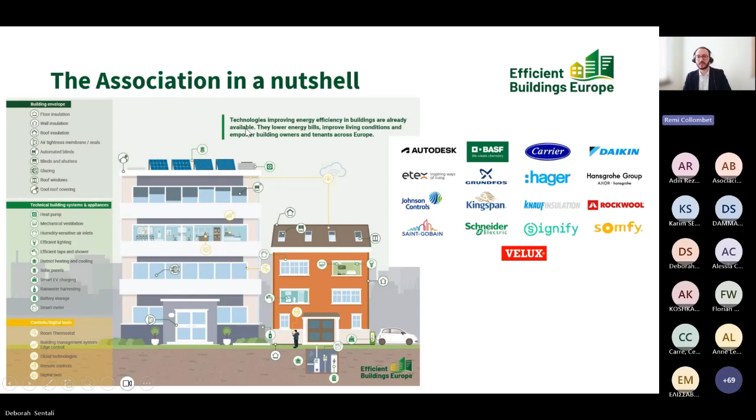We'll have 2 sessions. First one looking at the macro level, the policy level, and perspective from the insurers. People literally cannot afford not to look at the impact of climate change. Session 2 will be a more micro-focused session looking at how concretely on the ground cities are adapting and technology providers can push solutions to help us navigate and manage this adaptation question.

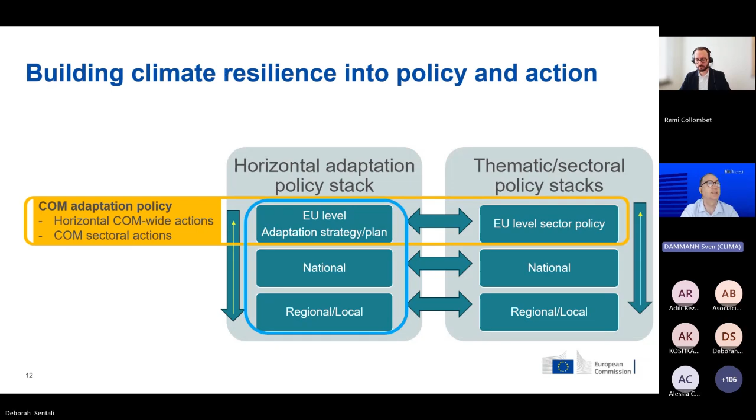So this all will be part of the policy package that we plan to deliver end of this year. There will be a communication explaining the entire context. There will be this legislative proposal that I've mentioned. And then also an impact assessment with summaries of the extensive stakeholder consultation that we have run preparing this proposal.

And this digital tool, a European climate viewer, helping the responsible authorities to look in granularity at what climate risks they are exposed to.

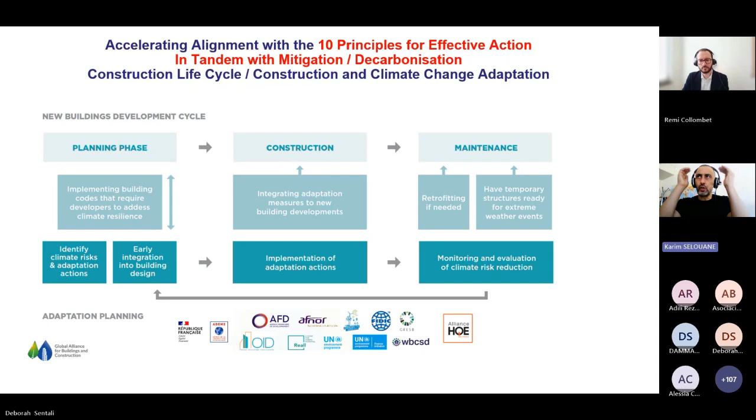All these documents could be downloaded from Global ABC if you want more information, but it's very important to know that the 10 principles are included inside the Déclaration de Chaillot, signed in March 2024 by more than 75 states.

Now, how does this international proposal, this international advocacy, find a very tangible alignment with a national strategy? This is the example of the French method of ABCD.

As mentioned by the previous speaker about the context of climate change in Europe, in France specifically we have some predictive models. We try to follow TRACC number 3, and we include the scenario of plus 4 degrees, looking at how we could prepare the building sector to be adapted in the context of plus 4 degrees.

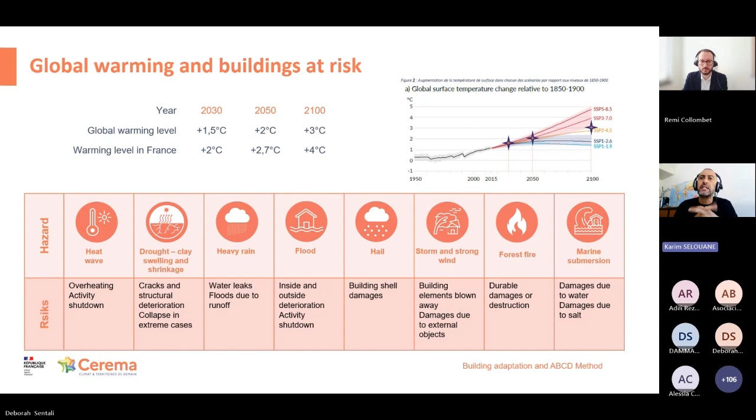We know that there are some hazards and specific risks related to the building sector. Each hazard has a specific impact on the building sector, as mentioned in this slide. For example, for flood you could have inside and outside deterioration of activity and shutdown. For storm and strong wind, you could have building elements blown away, damage due to external objects, etc.

The phases of the ABCD methodology, in French this is Adaptation des bâtiments au climat de demain. In English, Buildings Adaptation to Tomorrow's Climates.

Two points. First, this is real estate risk diagnosis. This is the baseline that we need to have: framing of diagnosis, exposure analysis, vulnerability analysis, crossing risk analysis, and prioritization.

The second pillar is adaptation strategy based on this first point: selection of action, adaptation logic - reactive, incremental, and transformative. It's very important to keep in mind that the adaptation action should be very agile, because you could have uncertainty in predictive models, and the question is how you could invest with good investments without wasting your money, with the good solution, without the solution you design today becoming obsolete for the next decade, for example. That is something very important with the incremental process. And the trajectory and action roadmap, notably aligned with your specific predictive climate scenarios.

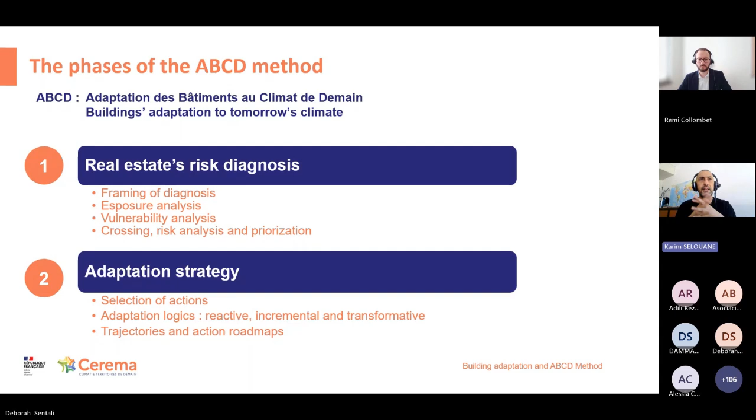Now we need to define the risk. We have two parts: external parameters and internal parameters. What we mean by external parameters is climate parameters with the TRACC level - this is the French reference that we use for TRACC number 3, for example, with specific national climate indicators validated by Météo France and the IPCC.

The second point is the territory's vulnerability. It's very important not only to have a building-scale vision, you need to have a much larger geographical area to have a clear vision about the externalities that could reinforce or mitigate your risk and the level of exposure.

For the internal parameters, this is the sensibility, the stakes, and the adaptive capacity. For example, concerning the stake, you don't have the same strategy if your building is a hospital, or if your building is a hotel, or a domestic house, because it depends on the uses of your building, and the uses have very specific stake consequences.

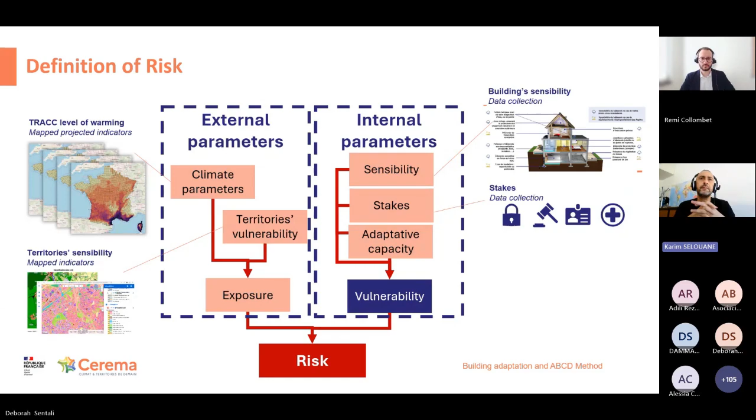Now this is the adaptation strategy. First of all, we have in France a national risk diagnosis, a map of the vulnerability. This is very important to have this first vision, because you could have some category of risk and prioritize your action depending on specific stakes, specific issues, and specific capacity to finance. It all depends on the balance between national policy strategy and local policy strategy.

The second point is a strategy that you want to propose based on this risk diagnosis, a strategy based on technical solutions, organizational solutions, notably concerning which governance you need to propose to be very adapted and to have a very proactive action to answer the risk, and nature-based solutions also for each national and local action for the building sectors.

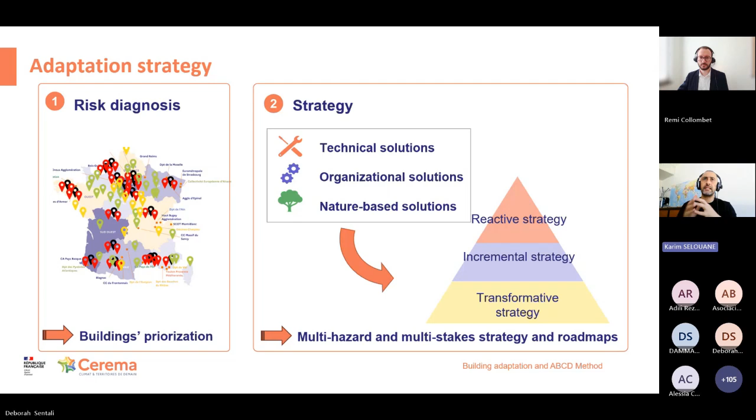Next slide. Suggested topics for the works. Data analysis at the beginning, for identification of available data.

Do you remember what I mentioned during my introduction for the 10 principles? This is the same, absolutely aligned. Actors managing this data, collecting this data, centralization and accessibility. It's very important to be sure that local stakeholders have access to this qualified data, with analysis for each climate hazard. And for technical solutions, what we mean is the identification sheet for each solution, data collection, monitoring, performance, collection of implementation cost, and cost versus performance analysis.

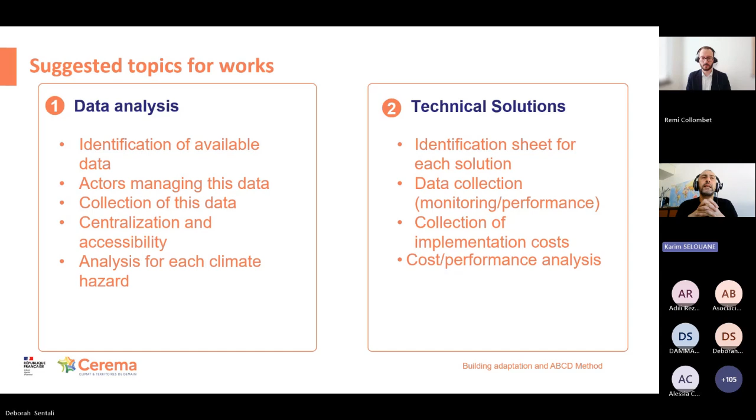Next slide, please. Thank you very much for your attention, and I am available to answer your questions at the end of this meeting. Thank you very much.

Very comprehensive presentation, really making the link between what's developed as a framework at the international level and how it's adapted in the national context.

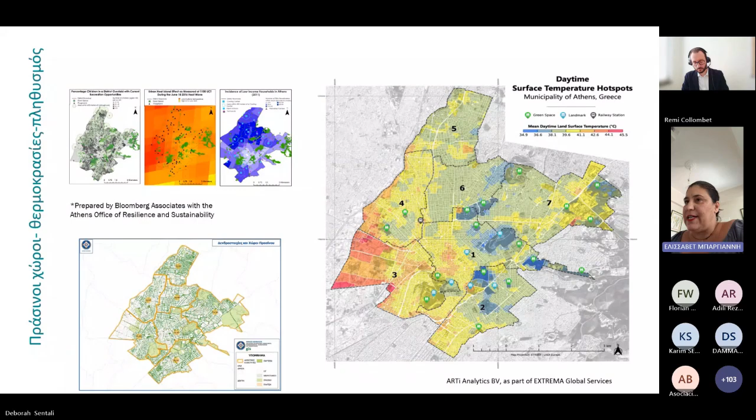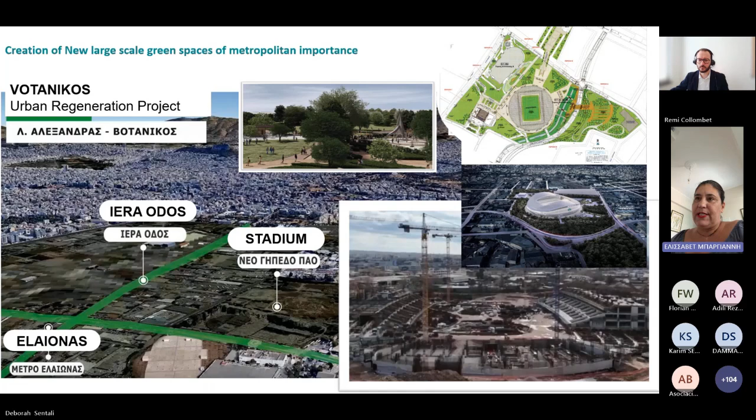So what do we do? In the west part of Athens, as you saw in the previous map, which is the most heat vulnerable area, we are creating now a 22 hectares size park in the ancient, it's a post-industrial site in the area of Elaionas, the ancient olive grove. It would be the biggest park in the city of Athens, trying to resolve issues with heat vulnerability and creating more green spaces in that part of the town and in the Western Attica area in general. Next slide, please.

We also set up a goal of planting 5,000 trees per year. That's a planting scheme that started in 2024, and we have created a registry and a monitoring platform that you can go and visit. So far, we've planted 13,000 trees. Next slide, please.

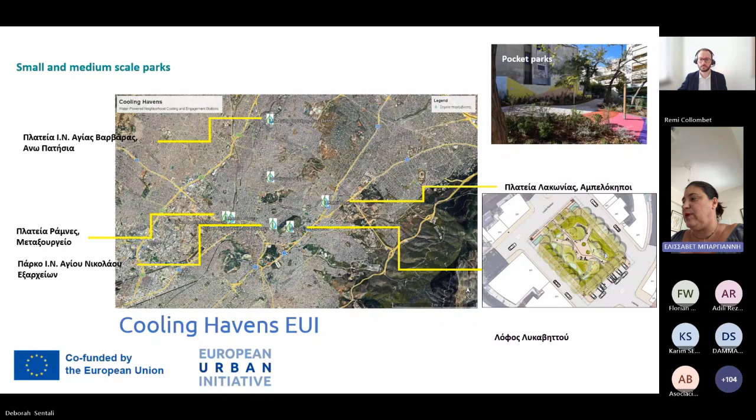But also we focus on creating more spaces where we have available spaces, such as pocket parks, and also a very interesting project that we do as an EUI project is the Cooling Havens project, where we try to create nature-based solutions and water features in 5 parts of the city of Athens, with stakeholder engagement and the participation of residents. This will be finalized in 2028. Next slide, please.

Recently, we've done the microforest, the first microforest in Greece, in one of the most densely populated neighborhoods in Europe.

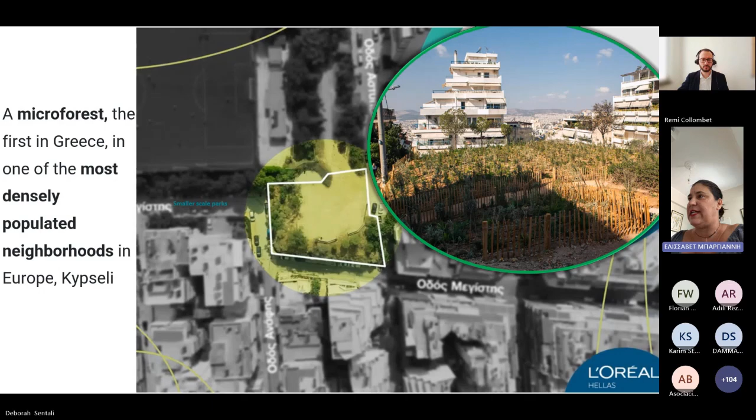We also focus on how to ventilate the city in a natural way by creating green corridors. In the city center, for example, we finalized the Athenian Great Walk and the Vassilissis Olgas Avenue, which has been recently finalized.

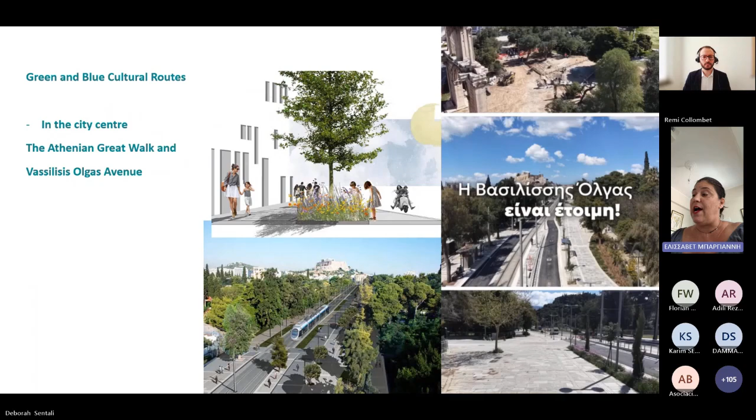On the local level, we have prepared tender documents for 3 neighborhood areas that connect other green spaces, creating using nature-based solutions, 3 avenues. What's important here is that because of the lack of space and the unavailability of space, it's very important for us to combine the mobility issues with green infrastructure issues. That's what we do, and that's where policies run down to.

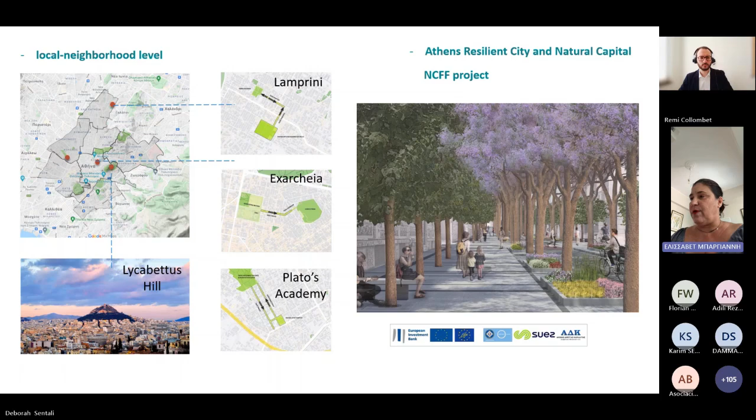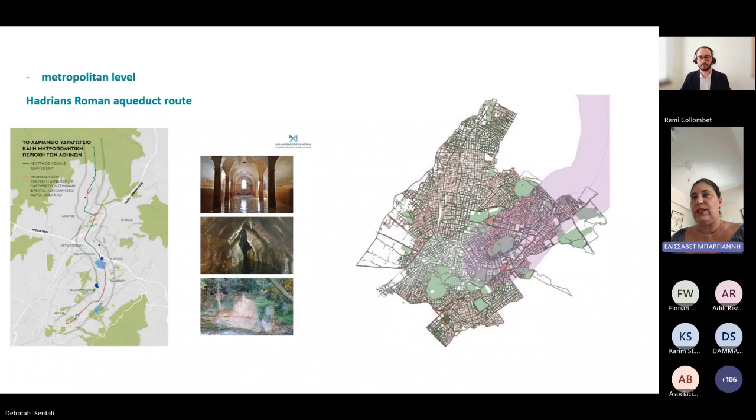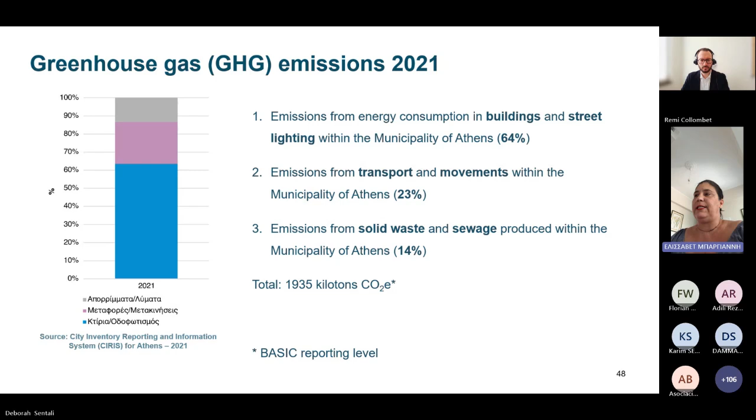This is an indicative diagram showing that the emissions of the municipality of Athens come mainly from energy consumption in buildings and street lighting, especially in electricity.

In the last part, you see how great the electricity consumption in buildings in the municipality is, and what's the share on residential and commercial.

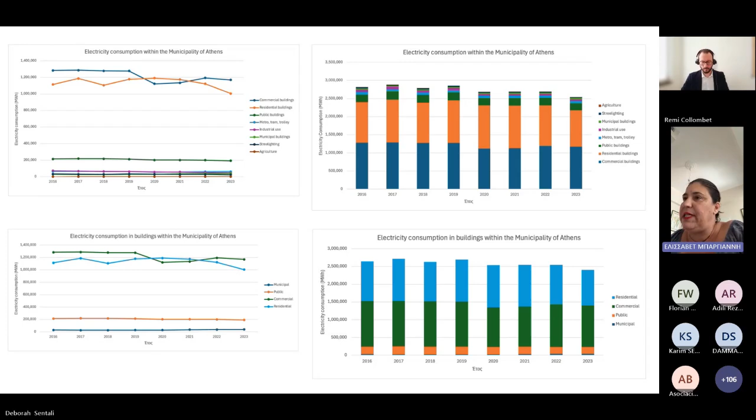The energy consumption has not changed that much over the years. We do need major energy upgrades in buildings, and higher electricity and heat consumption belongs to homes and shops, while public buildings constitute a very small part of the consumption.

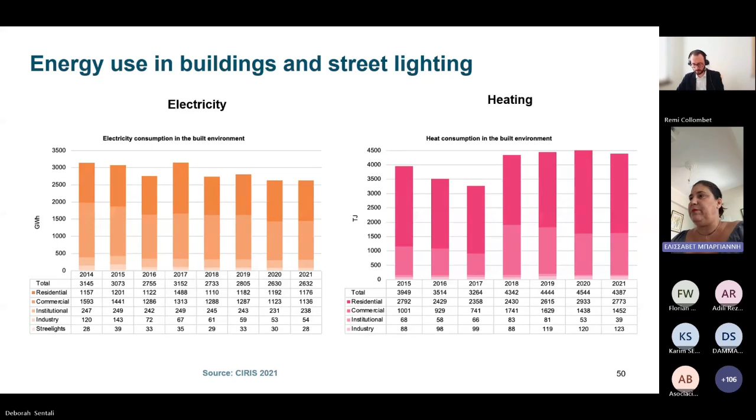After an analysis done on the buildings in the area of the city of Athens, we see that almost 48% of the residential homes are using heating oil for heating, and almost 30% use natural gas.

75% of the building stock of the municipality of Athens is not insulated, which is a quite big number. Although there have been projects for energy upgrades, nationally and locally, there's still a long way to go. These are old buildings, built before the regulation of thermal insulation of buildings in 1981.

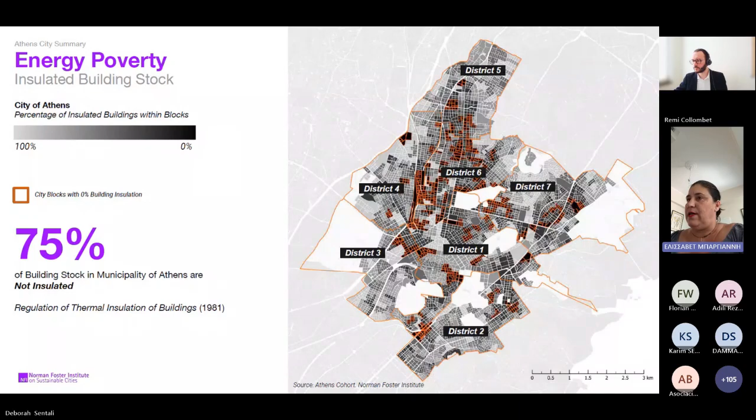We have run programs for companies and enterprises in the historic city center in order to give motives to upgrade the buildings. We call it the Green Athens Toolkit, which is a project that has been finalized.

Now we focus on the vulnerable populations, creating the Energy Alleviation Office very recently, 2 years ago. We have certified energy advisors and mentors, technical support, and tailored energy solutions for households. We've set up 0 municipal fees for energy vulnerable households. We issued the energy benefit card, 0 cost electricity for 22 years for 4 single parent families.

We have also distributed about 100,000 LED lamps to vulnerable households. We're happy to say that C40 collaborated with us and gave us technical assistance for certified auditors for our Energy Alleviation Office. Our key achievements include approximately 1,000 households registered, and 0 municipal fees for about 200 energy vulnerable households.

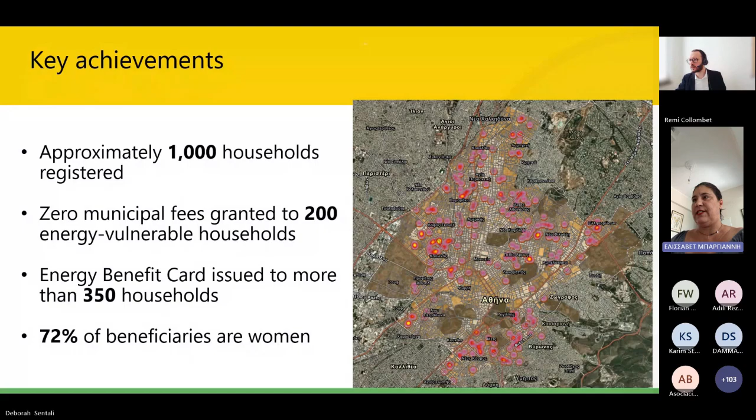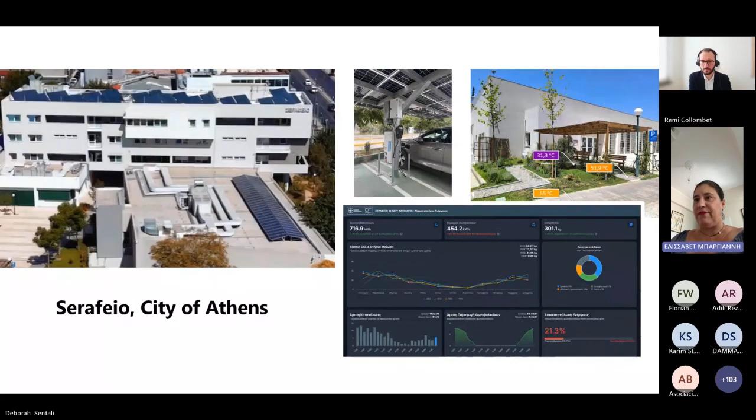We do things about energy, about awareness and training our staff in the city of Athens. We've set up the Energy Academy.

We're very proud to present the digital platform for municipal energy management, with a centralized energy data platform for the municipality of Athens, developed by the IT company of the city, DAEM, and the National Technical University. It supports data-driven energy planning and decision-making, and provides a unified view of municipal energy performance.

It has a centralized energy dashboard. The dashboard gives users a clear overview of total energy consumption. You can see the buildings by category: public buildings, parks and squares, schools. You can search and filter assets by name, category, or district.

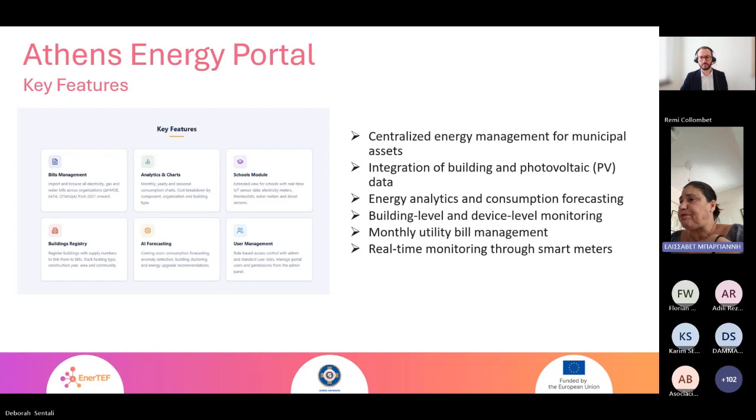There's the opportunity to add new buildings and manage existing assets, or export data for reporting and analysis, and access any energy bill.

It's the centralized energy management for the asset, which has to do with integration of building and photovoltaic data, energy analytics and consumption forecasting, building level and device level monitoring, monthly utility bill management, and real-time monitoring through smart meters.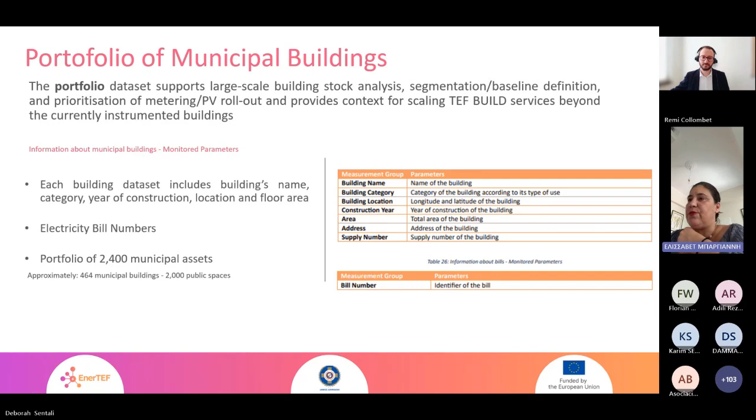I think if we're running out of time, I will not get into more of this. If you just scroll down to the last slide, that would be good. Thank you very much, that's perfect. Thank you, we'll have a bit more time for the questions.

Thanks a lot for the presentation. It was very clear on how Athens is combining this neighborhood approach with green solutions, transport, but also action on the buildings themselves to act on climate adaptation. I think this is very inspiring, and I'm sure some people will have questions for the Q&A. But before that, we're moving to our next guest speaker, Alex Koshkarov from Somfy, who will present the solutions that are already available to deal with the changing climate. So the floor is yours.

Thanks a lot, thank you Remy. Good morning all, my name is Alex Koshkarov. I'm a Commercial Buildings Sales Director, Europe at Somfy. And before I start, big compliments to the municipality of Athens — indeed, a very impressive plan, especially the greenification of the city. Well done, Elizabeth.

So for my part, today I would like to take a very practical stance and talk about the important role dynamic solar shading can play in preventing overheating in buildings. I think it was already mentioned several times, especially by Sven — thanks, Sven, for these comments.

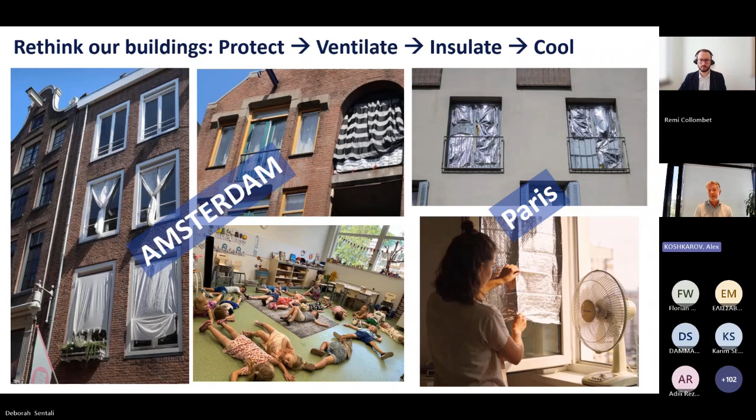So here's a bit of facts and figures. Let's take a typical standard window: when it's directly exposed to the sun, the solar heat entering the building is roughly equivalent to having a 500-watt electrical heater running constantly. In a couple of hours, such a heater can warm up the space by more than 10 degrees. So the most effective solution is not to cool down the space which is already hot, but really to block the heat before it reaches the inside of the building. This is exactly what dynamic solar shading does — in summer, shutters, external blinds, Venetian blinds, and screens block the sun before it reaches the glass.

Because the solar radiation is blocked, buildings can experience up to 80% less solar gain compared to buildings without solar protection. The result is a much cooler space, typically a difference of 4 to 7 degrees Celsius. That means better comfort for occupants, and compared to the electricity needed to cool the space to such a temperature, it would save us 70% of the energy.

In the winter, the function of the solar shading is opposite. So we keep the windows open during the day to let the free energy from the sun heat up the space. And during the night, we keep the shutters and screens closed, creating an additional insulation layer that keeps the warm air inside the building.

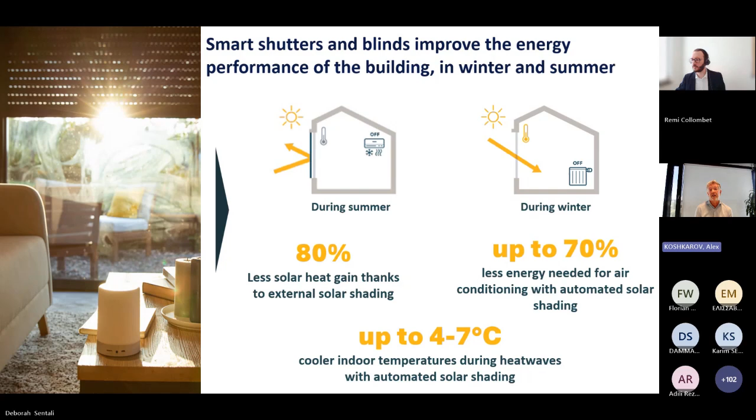Just one minute to conclude. So very short, a concrete example from real life: an adaptation of 15 schools in Poissy, France. As many municipalities, Poissy was looking for a way to adapt the schools in the municipality to the changing weather conditions and increasing temperatures. So they decided to take 15 schools and equip them with external solar shading, motorized and automated.

The results have been remarkable. Compared to classrooms that have traditional internal solar shading, not motorized but manually operated, indoor temperatures dropped by more than 5 degrees. And the improvement also has a very strong energy performance, delivering the same level of thermal comfort by cooling the space by 5 degrees.

This would cost the municipality more than 300,000 kilowatt hours per year, which basically equals 200,000 euros of investment. Compared to the initial investment in dynamic solar shading for 15 schools, which equals 800,000 euros, this gives us a payback of the solution of 4 years, with a long-lasting performance of the system. So this example shows that effective solar shading is not just a comfort solution, it's also a very cost-effective and energy-effective solution. And while I was showing you the example of the school, a similar approach and similar solutions could be applied for non-residential and residential buildings.

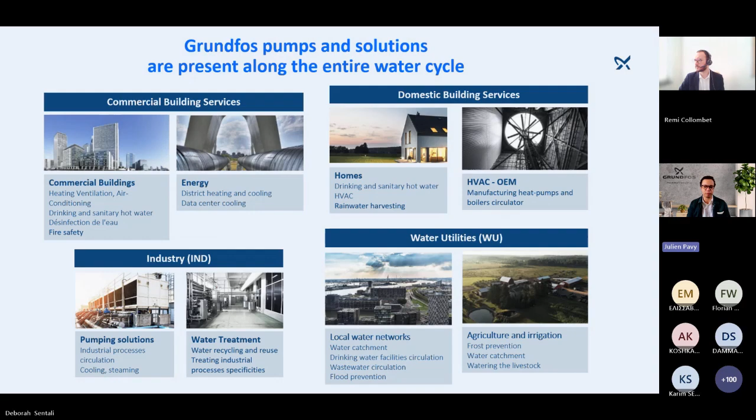I'm going to talk a bit about our French factory because it's directly linked to what we're going to discuss today in building resilience to climate change. This French factory builds the circulator that is integrated into boilers and heat pumps. For heat pumps, there are specific activities, as a heat pump needs to function with the smallest amount of hot water it can create. It has to be as performant as possible.

So we produce those circulators, and then we produce 80,000 dosing pumps that are essential in industry and water catchment as well. This means that wherever you are in Europe, it is quite likely that you will drink water through a Grundfos product at some point.

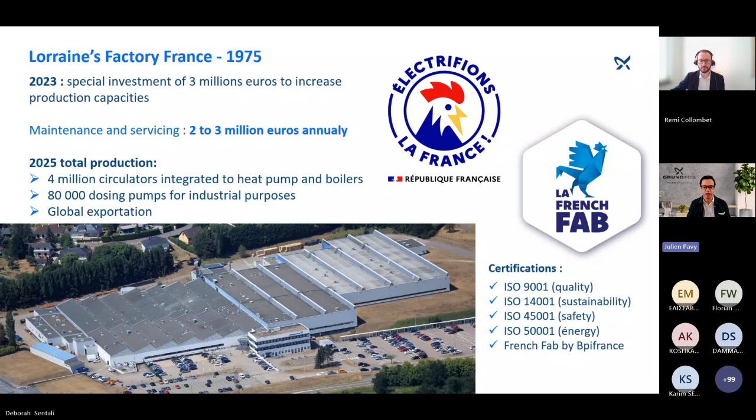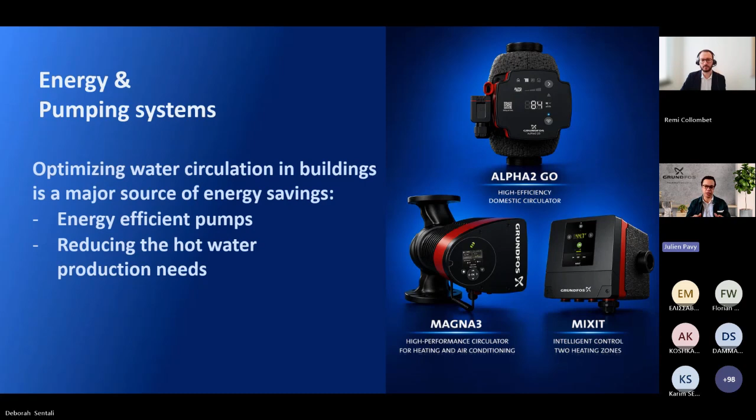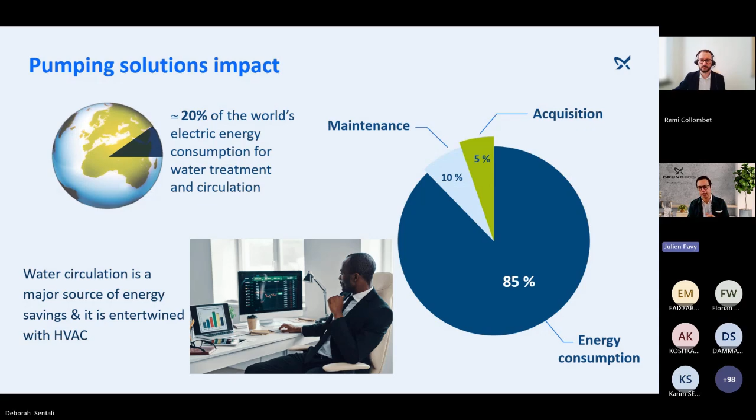Grundfos has worked on reducing its energy consumption through smarter products. A heat pump needs hydronic balancing, which means the same temperature of water goes through every radiator, every terminal point. This is facilitated via smart pumping solutions that we have at Grundfos, and this helps the heat pump diminish its electricity consumption by 10 to 30%.

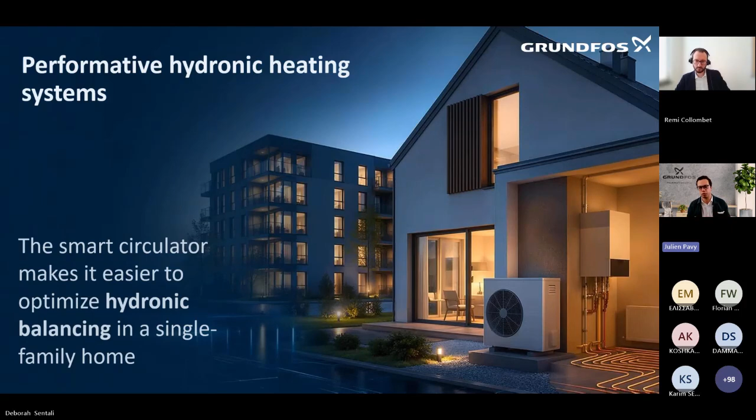Hydronic balancing involves different valves that help direct the water. What we need is the same amount of hot water in every terminal point, whether it's underfloor heating, cooling, or radiators that can also diffuse cold water and cold temperatures. Because we have millions of energy-intensive circulators that aren't helping this balancing, heat pumps overconsume, and if a heat pump overconsumes, it eventually breaks or gets prematurely damaged. So what we really need is to improve this system. It's cheap, it's feasible, and it's a direct answer to climate change and our need for more efficient heating and cooling of buildings.

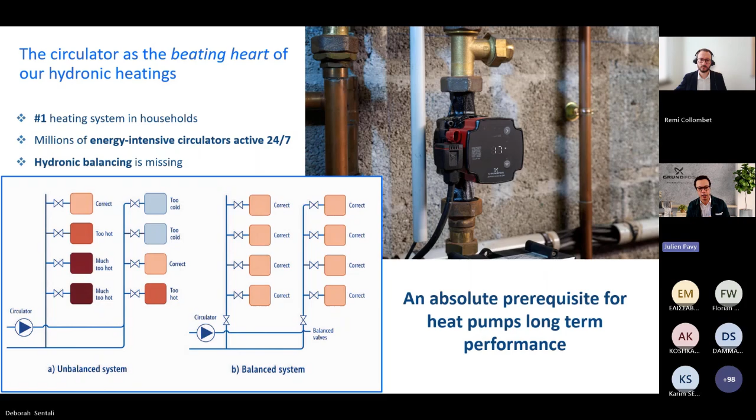I think that's my last slide, and I would be done here. Yes, and this, of course, works in homes and bigger buildings for district heating. It works everywhere. Distributing the smart amount of water helps diminish the consumption of the pumps themselves, but also the heat or cooling source, by having a smart distribution of water. This is the core of what I wanted to say and what Grundfos tries to achieve: to diminish its Scope 3 emissions and improve climate solutions for everyone.

Thank you, Julien. I think clearly highlighting the benefits both for water consumption, but also for the overall consumption of the energy systems, and bringing prices down for everyone. So thanks a lot for highlighting the solutions.

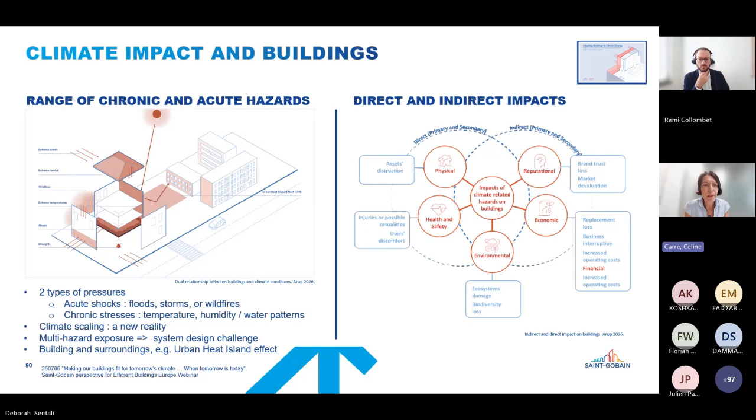The next part, the second part of the work we did with Arup, was about design. We need to understand that the challenge is no longer designing for a fixed climate, but for a range of plausible futures. Broadly speaking, we see 3 complementary principles for designing for resilience.

First being robustness, to enable the building to withstand climate stress, adaptability via control to understand the interaction with hazards, and flexibility via modular and upgradable systems and monitoring. It's important to know that there's already a range of design methods based on climate risk assessment via standards like ISO and EN standards, and other elements including digital tools that are actually helping to undertake design for resilience.

It's important to recognize that climate uncertainty is linked also to those residual risks that cannot be fully designed out, especially in existing buildings. And you see a range of actors that need to be encouraged to better collaborate: investors, regulators, designers, contractors, owners, tenants, and insurers. They don't have the same information, the same interests, and this is what policy needs to encourage, that their collaboration happens much earlier in the process.

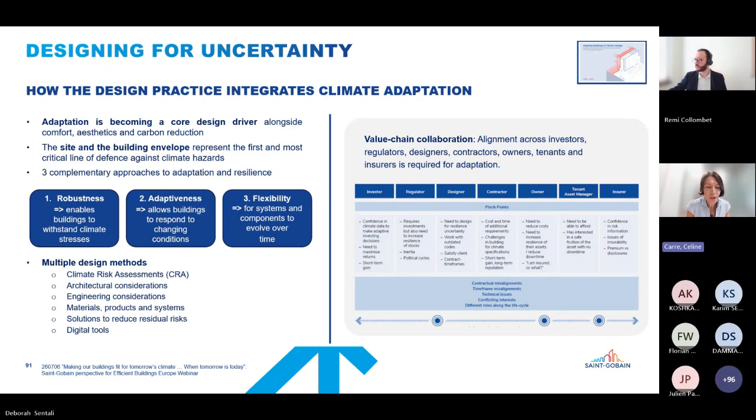On the next slide, this was the third big pillar in the work Saint-Gobain did with Arup. We've been reviewing a number of key families of solutions, and they both work for mitigation and adaptation, and most of them already exist: climate resilient building envelopes with high performance insulation, thermal mass solutions, advanced glazing as well, both to maintain temperature and improve resistance against events, but also keep energy consumption low. Solar protection and passive cooling measures go together, including solar control glazing and external shading and facade solutions.

Then we have nature-based solutions, reflective and permeable surfaces to reduce local heat accumulation, but also the fifth one, protective and resilient construction systems, which include water impact and fire-resistant materials. So all of them exist, broadly speaking, in our range of solutions, but the report reviews all of them on the market, not just the Saint-Gobain solutions.

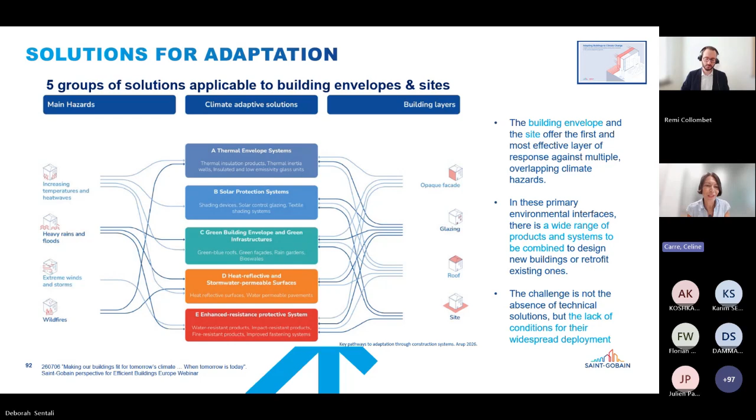Moving on, what does that tell us regarding what to do and what it means for building policies? I have 3 main messages for what we need to do next together. The first is that we need to secure a holistic approach, and I take here what it means in terms of Saint-Gobain's position on summer comfort.

We need to understand where our capacity to act is, and on summer comfort it's on materials and construction methods, whereby we remind that we need high performance insulation. And it is in synchronicity with what's happening in winter: we need to reduce heat requirements in winter and keep homes cool during heat waves.

The solar control glazing is important as well. It can help to lower the temperature inside a home by up to 6 degrees, and also defer the moment by which we will need active solutions such as air conditioning. That's important to understand, this interaction, whereby equipment and systems will help maintain comfortable temperature over time and are needed for prolonged heat waves.

We promote that holistic approach to renovation. And what policy needs to drive is that each solution reduces thermal discomfort individually, but their combination will make the difference, both for the comfort and health of inhabitants, but also for the bills.